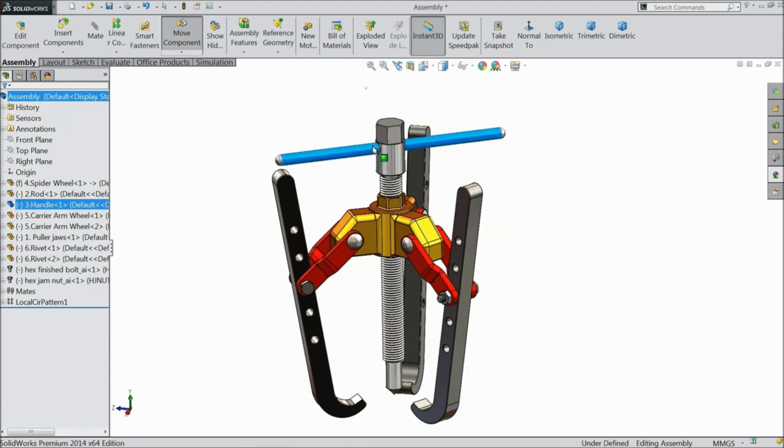We are going to design and assemble a 3-jaw puller. This is the 3-jaw puller, and this is the threaded rod. With the help of the puller we can extract any kind of bearing. This is especially a bearing puller. Let's see how to do it in SolidWorks. I hope you like it.

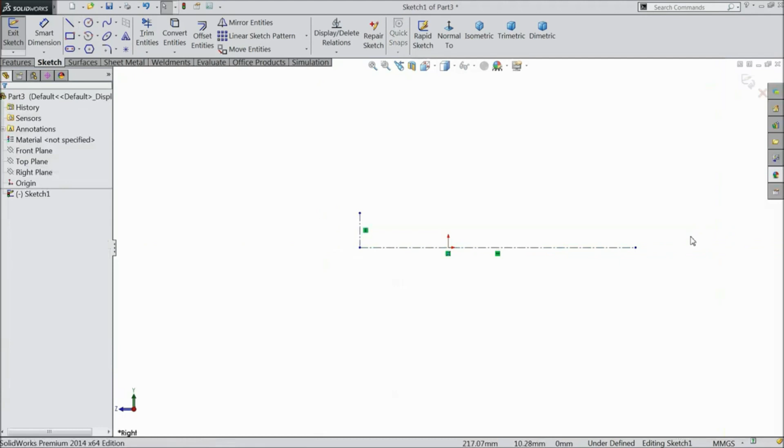Now here we will make the first part of the puller, the 3-jaw puller jaws. Let's start: choose right plane, sketch, and select center line. Start from here and pass through a line, making sure it passes through the origin. Select the line up to this line and draw a half circle.

Now select these 3 lines and make a relation symmetric. Now this geometry is symmetric. Draw a vertical line. Select circle and draw 5 circles here at equal distance and equal diameter. Now select these 5 circles and make them equal.

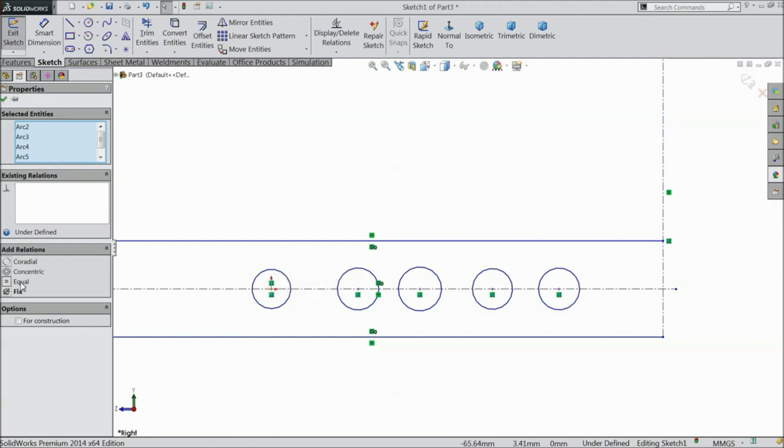Now first define the gap distance from origin point: 152.4 mm, and the distance from here to this point: 42.8625 mm. Make the radius 15.875 by 2 mm, and keep the inner circle diameter 7 mm.

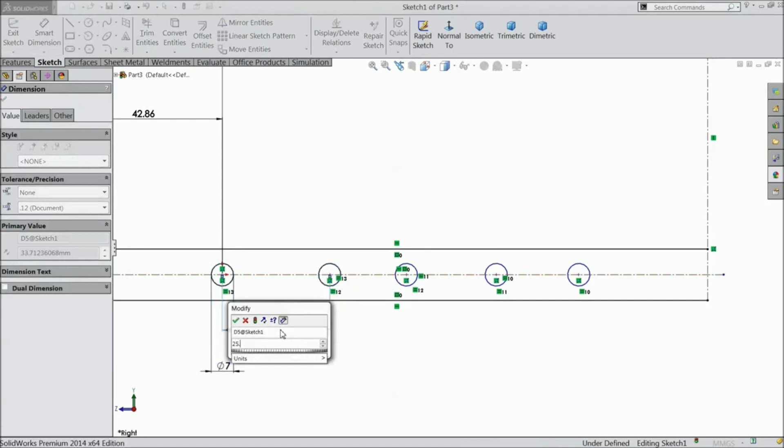Now we will define the distance between these two circles: 25.4 mm, the same 25.4 mm, .8 mm, and the last one from the third one 50.8 mm. Now this geometry is defined.

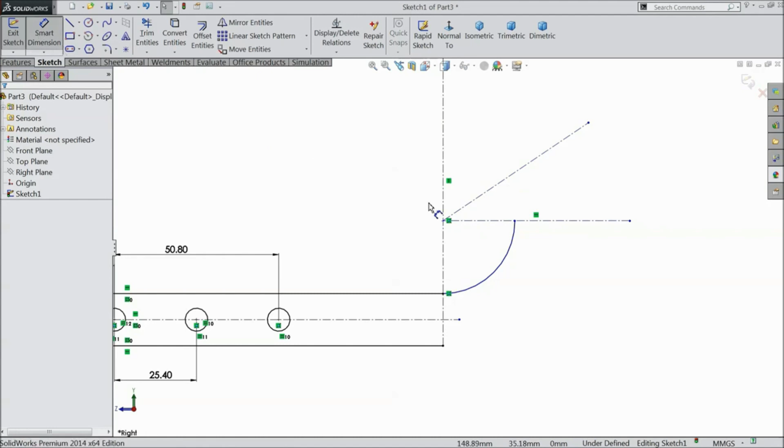Now choose center point arc here. Start to draw a circle. Just draw a center line. Make this angle 30 degrees. Select a line.

Connect with this line up to here and draw a circle. Connect here. Exit. Now make one relation: tangent.

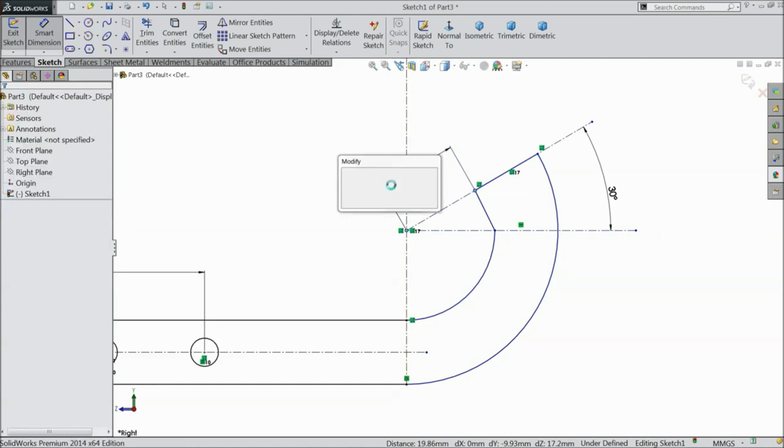Now define the gap, and define the radius: 15.875 mm.

Delete this circle because this circle's center should not be there. Select the center point, just below this, and connect with this line.

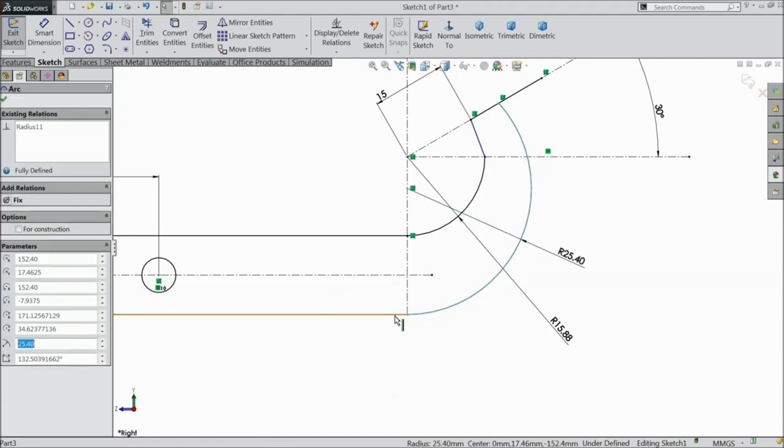Now just define the radius: 25.4 mm, 25.4 mm. Now make a relation between this line and this one: tangent.

Select trim entities. Now select these two lines. I think no need, it's already in perfect position. Select fillet and define these two lines as 3 mm. Now this is our geometry.

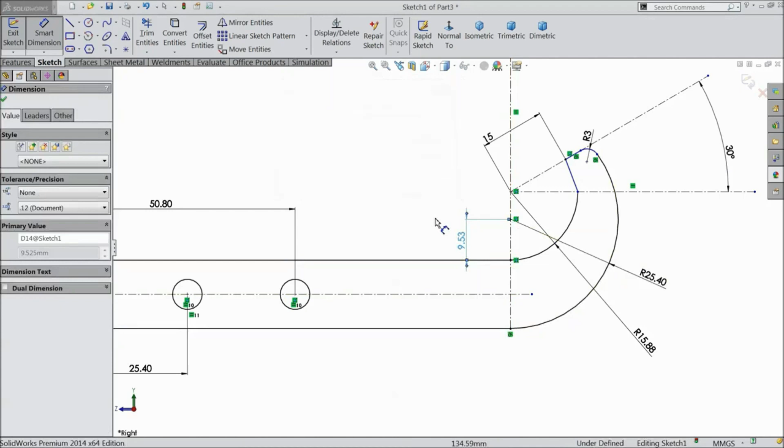Now we will extrude it. Make sure this point is 9, by default 9.525 mm. Now select extruded boss and extrude up to 15.875 mm, choosing mid plane.

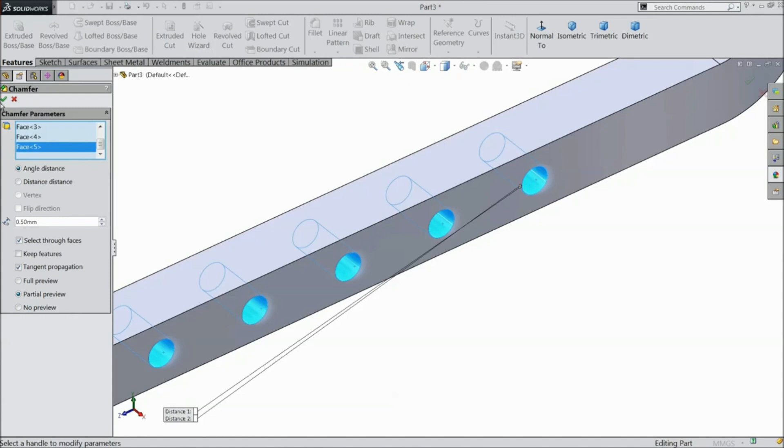Now select chamfer: 0.5 mm, and select these inside faces of the hole. See, it's become a 0.5 mm chamfer. Now select fillet, keep 0.5 mm. Select one surface and another edge, and select two edges. Now this is the jaw for the 3-jaw puller.

Let's define the material: chrome plating.

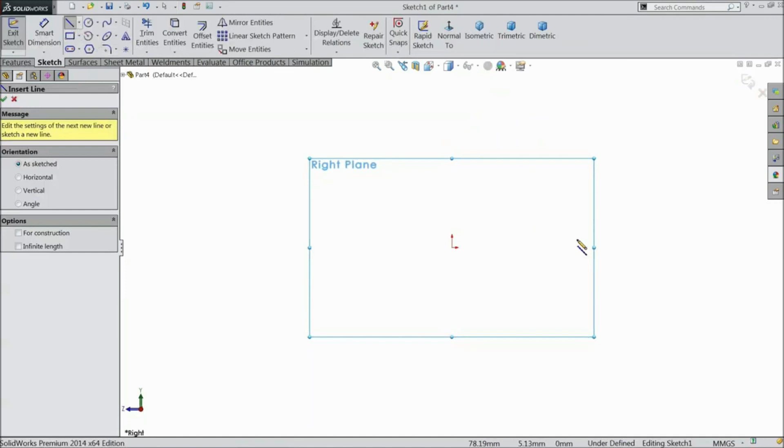Rod. Let's start: choose right plane to sketch, select a line, and start from the origin point. Draw a vertical line and connect again to the origin, exit. Now select this line and make relation vertical.

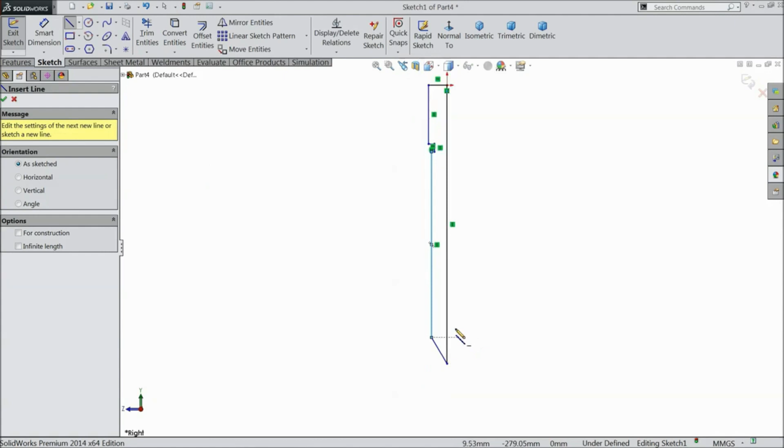Drag this inside, and drag this line also a little inside, not just inside - this is the outer line. Connect this point. Now delete this line and merge here. Now this is the exact geometry.

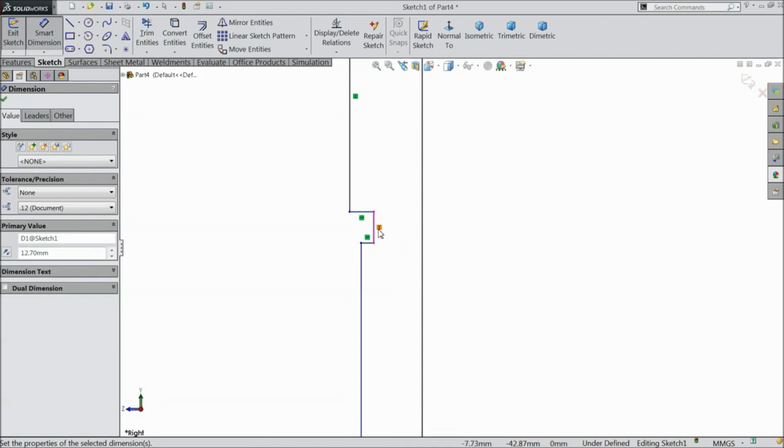Now let's define: 25 by 4, 25.4 by 2 mm, 7.5 mm, 19.05 by 2 mm. And let's define this: 14.2875 by 2 mm.

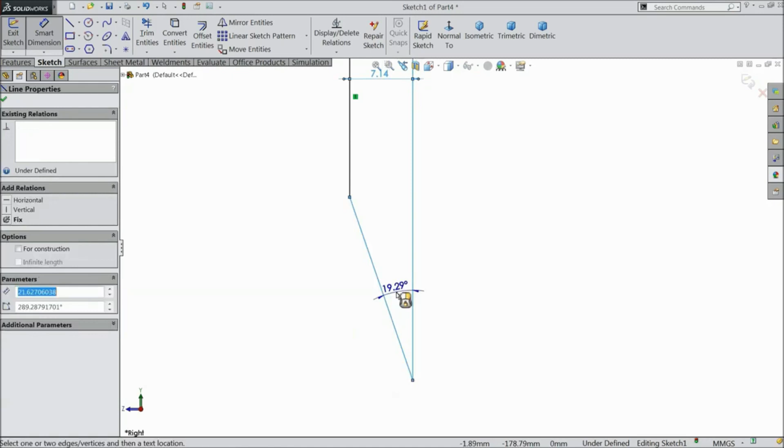Now let's define this angle: 45 degrees. Now we will define the length. First let's define the bottom length: distance from here to the bottom point, 31.75 mm.

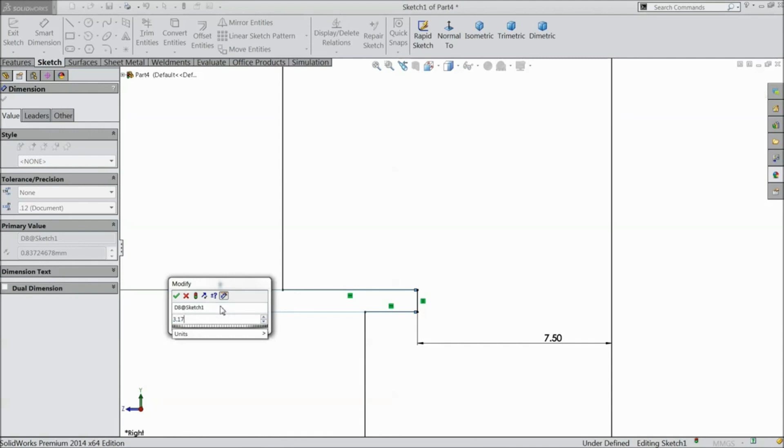44.45 mm for this length, 3.175 mm. Now let's define this length: 165.1 mm. Okay, now our geometry is fully defined.

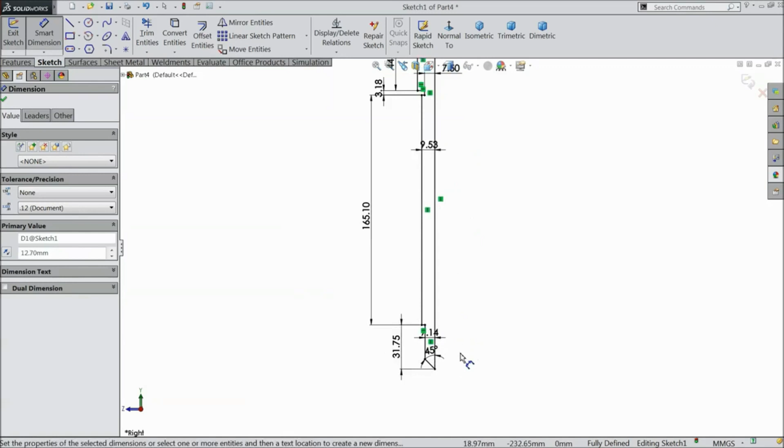Select revolve boss base and select this outer line as the axis. Now choose chamfer, first keep 1 mm, and select this face.

Now again choose chamfer, 0.5 mm, and select this bottom edge. Now here we will create some teeth.

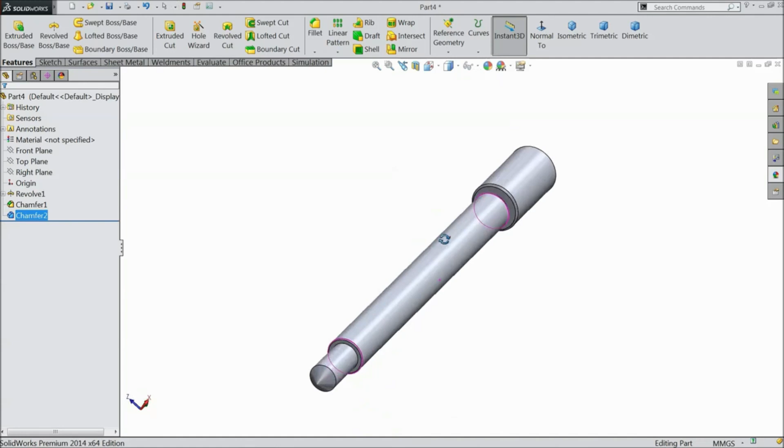So select this face, this sketch, select this outer circle and convert it - see, it is converted here. Now we will create the path for thread. Go to helix and spiral, and select pitch and revolution.

We will select the number of pitch: 2.116. Revolution: 79 mm, 0 degree, clockwise. That's it, this is our requirement.

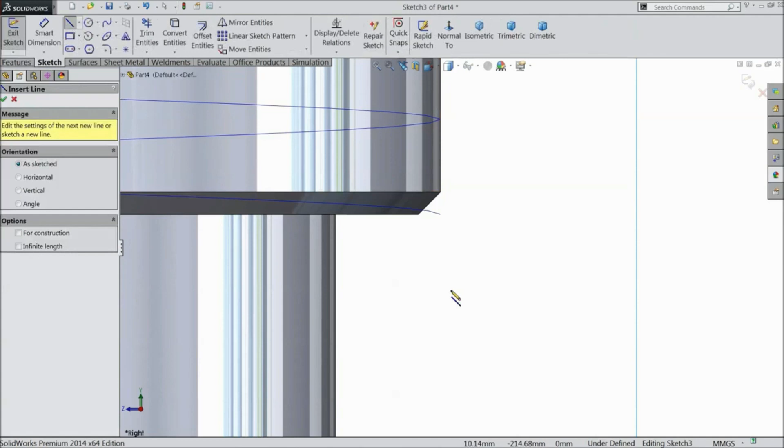Select OK. Now select right plane, sketch, normal, and here we will create the teeth path profile. Select both lines and make relation equal.

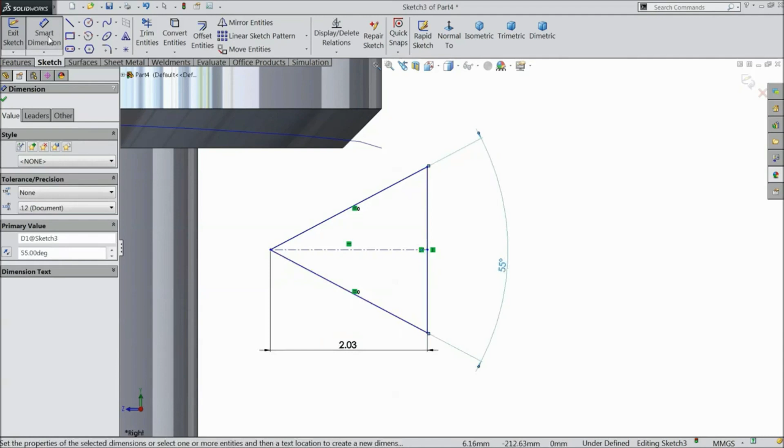Now let's define the triangle: 45 degrees, keep 55 degrees. Now the distance from here to here: 2.033. Now select arc, select 0.29, 0.29 mm.

Now select this path, meaning this helix line, and select this point, and make relation pierce - see, it is pierced here. Now just exit and go to swept cut. Here the profile is selected, just select this path. Now it's calculating; it may take time because the threads are very small and complicated, so sometimes it takes more time than actual.

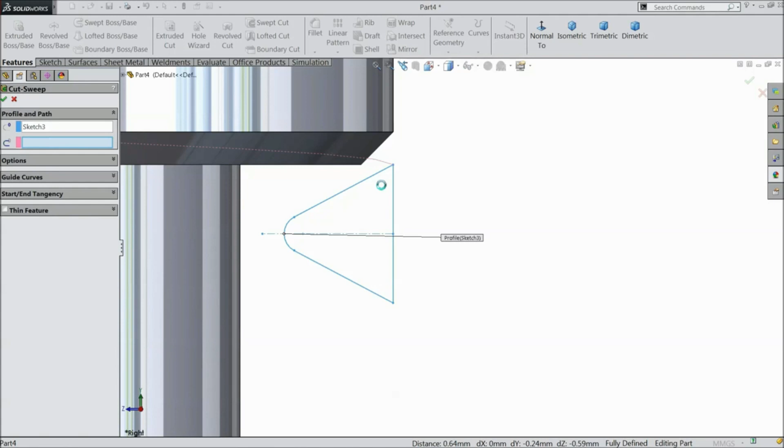Now it's finished, see - it's calculated. Select OK. Now see, the threads are created. Choose fillet, select 0.5 mm, and select this.

Taking time because maybe my computer is slow.

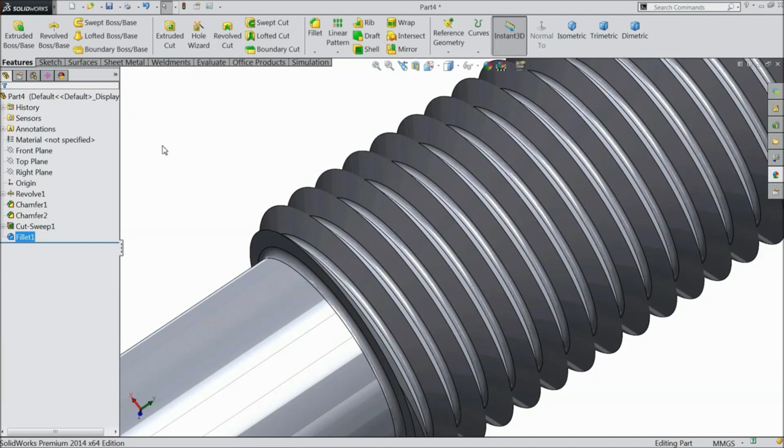Now we want to create some hole here. Select front plane, sketch, normal. First draw a center line, select line, and draw a circle in the center, keeping the diameter 10 mm. Select extruded cut and select through all both. Now the hole is going to be created.

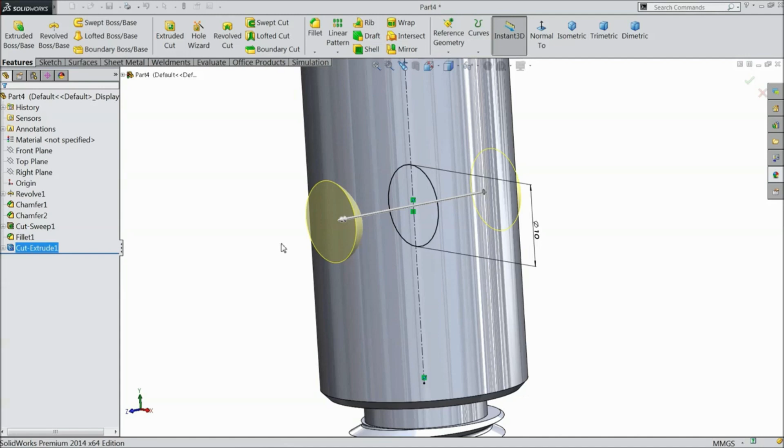Now select this top face, sketch, normal. Select polygon. Exit. Select this line: vertical. Now select this outer circle and convert it, that's it. Now select extruded cut and here choose this outer face.

Okay, that's only. Now just extrude up to 15.875 mm. See here. Okay.

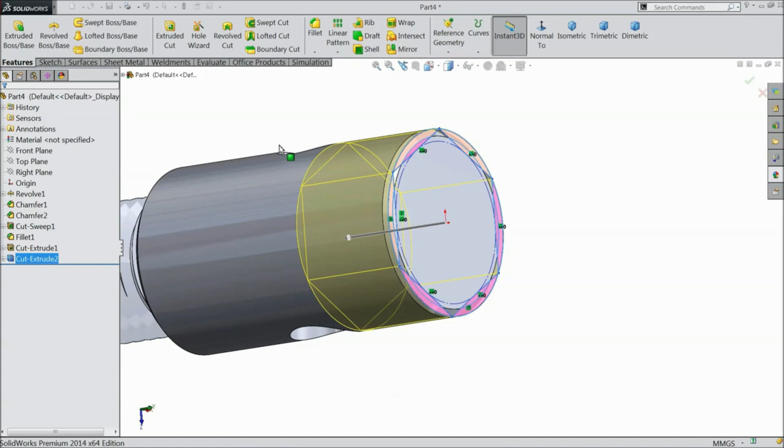Taking time because my computer is quite slow. Select 0.5, select this hole and select this edge. Close. Delete this edge. Now select this circle only.

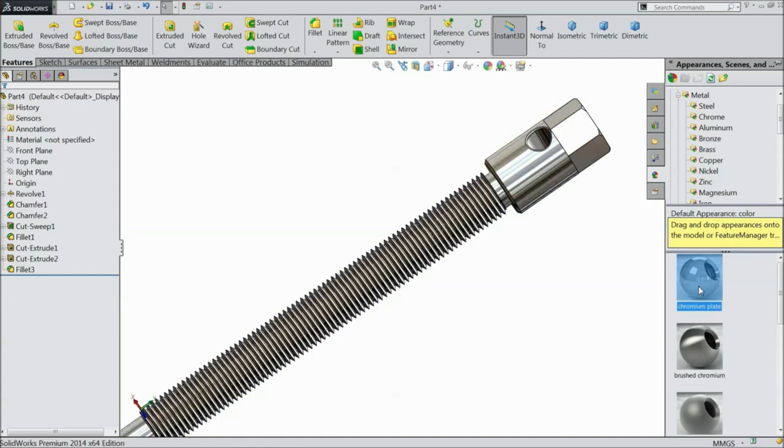Okay, now our rod is finished. Now we will assign the color or material. Just go to appearance and select chrome plating. See, this is the chrome plate.

Now save this part number 2, rod. Let's go for the next part.

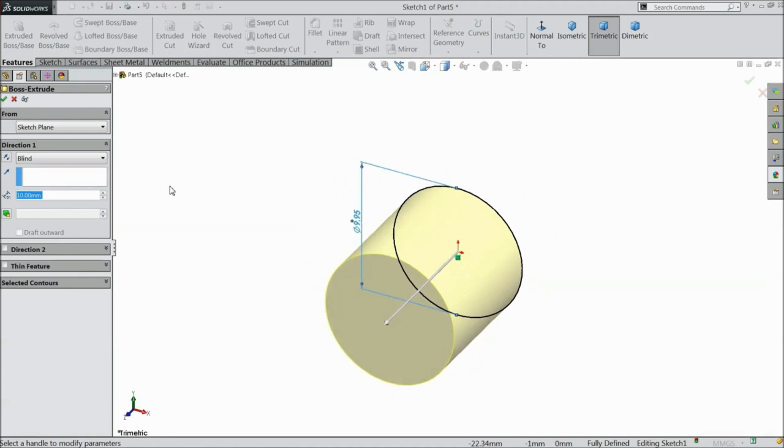Front plane, sketch and draw a circle and keep the diameter 9.95 mm. Okay, and extrude it. Keep the length 200 mm. Make sure mid plane. Okay.

Now select, go to insert feature and select dome. Select this face, 9.95 by 2 mm. Possible to select both the ends.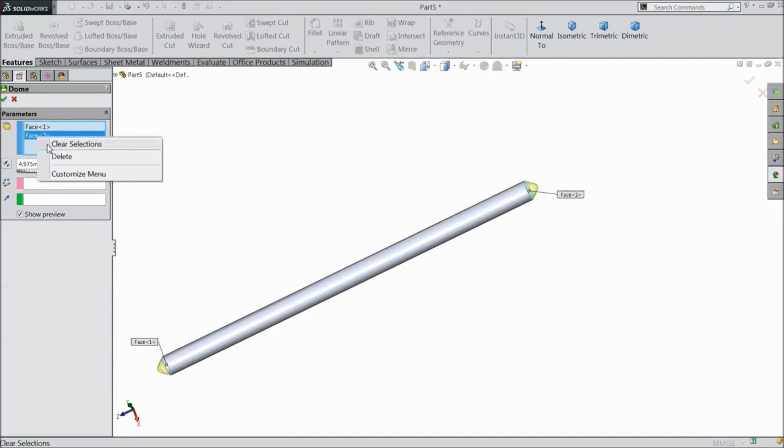I think it destroys the face. Delete. Okay. Now again go to insert feature and choose dome and select the same, 4.975 mm and select this edge. Okay.

Now we will assign the material steel satin finish stainless steel. Save. Now save the part number 3, handle.

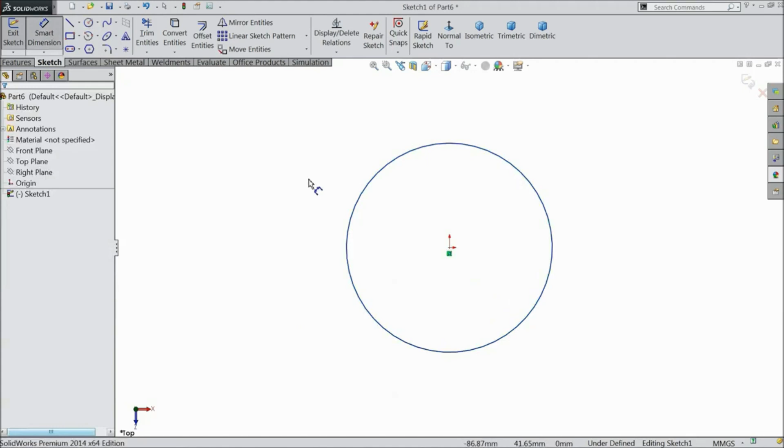Okay, so the next part is spider wheel. So choose top plane, sketch, draw a circle, keep the diameter 38.1 mm. Okay, and extrude it, keep mid plane, 50.8 mm. Okay.

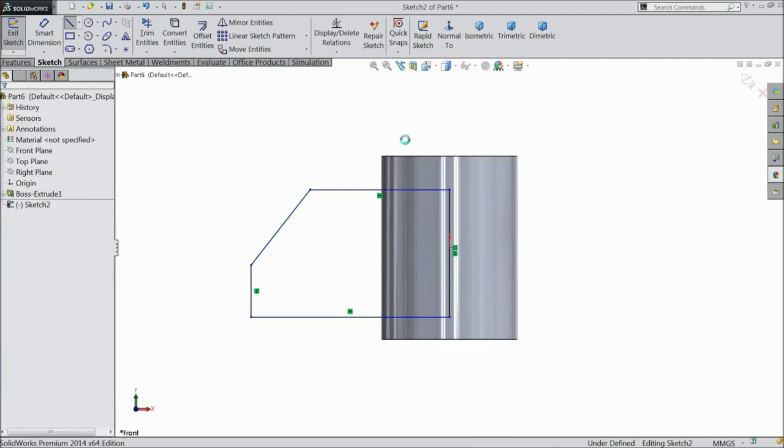Now select front plane, sketch, normal, select a line. Okay. Now let's define this geometry.

Distance from upper line 12.7 mm. And from bottom line 2.5 mm. Now define the overall length 53 mm.

This length 35 mm. Okay. Now select fillet.

First select 3 mm and select this corner. Okay. Now make 5 mm and select this corner. Okay. Now define.

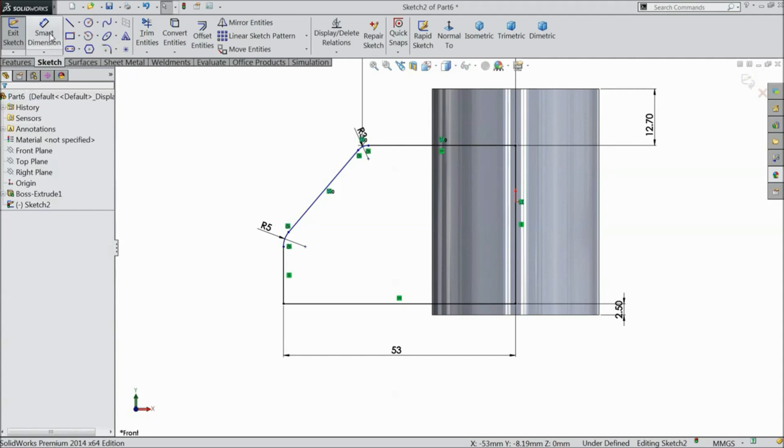Now do one thing, delete this relation. Again choose fillet. Now define distance from here to here.

Okay. Now distance from this point to this point, 13 mm. Okay.

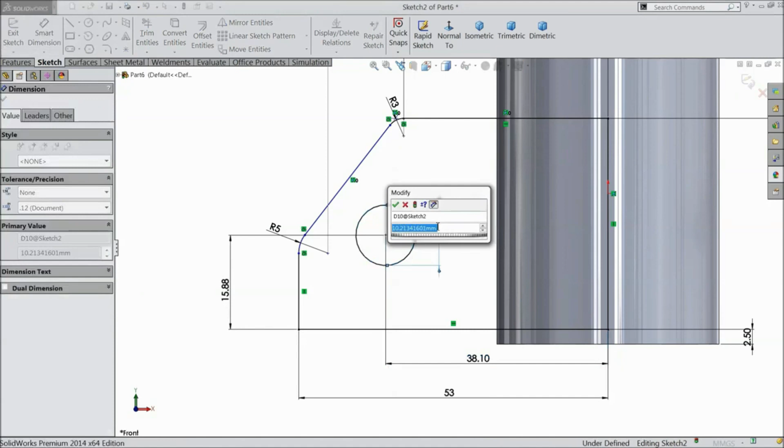Draw a circle here. 15.875 mm and the distance 38.1 mm, and the diameter 6.4 mm. Okay.

Select 15 mm. Select OK. Now let's extrude it. Keep mid plane. Select 25.4 mm.

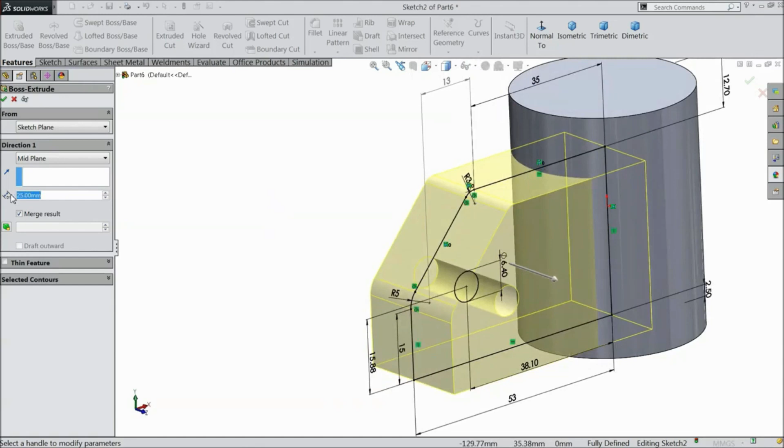Okay. Now we want to make 3 number of this body, so we want to make 3 number of patterns. Select this circle as the axis and here choose 3 number of patterns, equally spacing. OK.

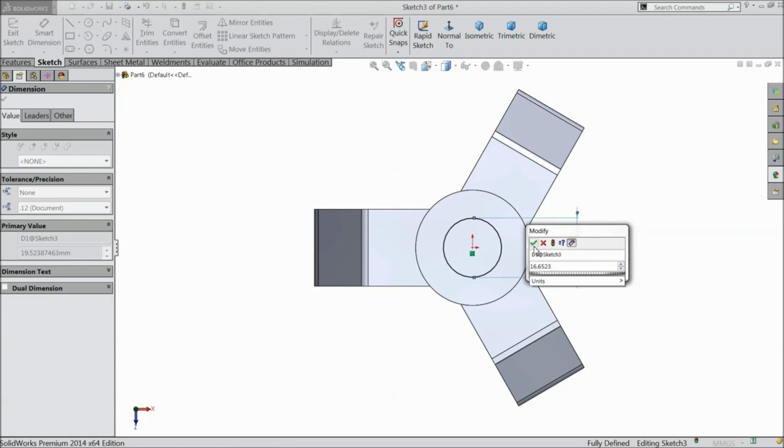Now select this top face, sketch normal, and here we want to create a hole. Keep the diameter 16.6523 mm. OK, and select extruded cut, select through all. OK.

Now we will define some fillet. .35 mm, select this edge. So now do one thing, select one by one all these 6 edges. OK.

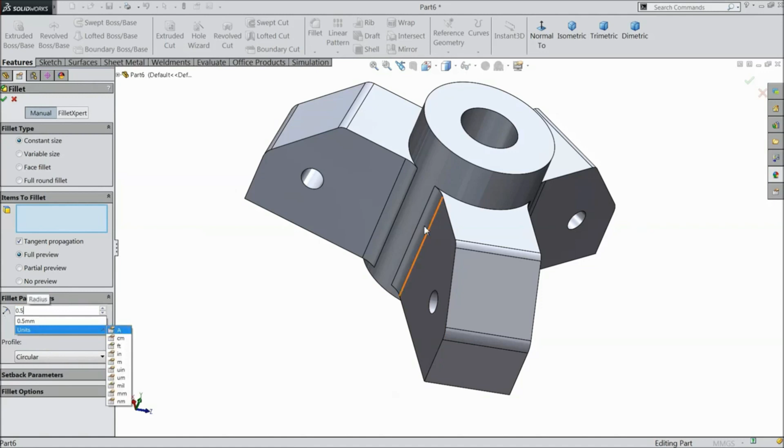Again choose fillet. .5 mm. Select this corner.

OK. Now select chamfer. Now select here 0.5 mm and select this inside face. OK.

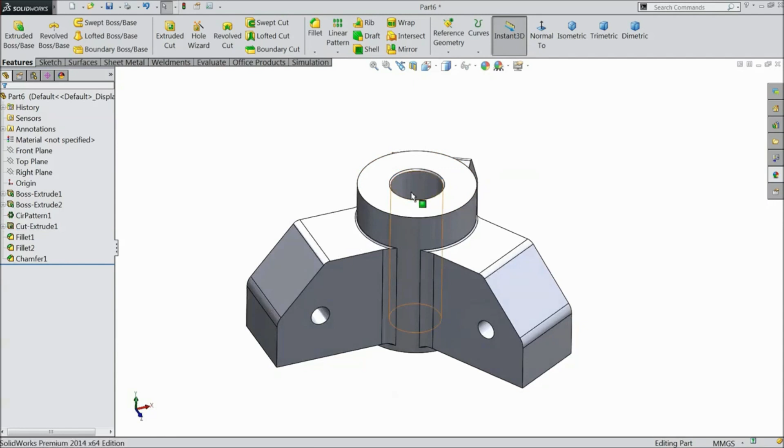Now after completing this body, we want to create some thread inside. So we will create thread with the help of our previous part. So let's browse this part.

Go to insert, select part. Select our first part, rod, which we created in our previous tutorial. Open. And here select locate part with move and copy feature. It is very important. Select OK.

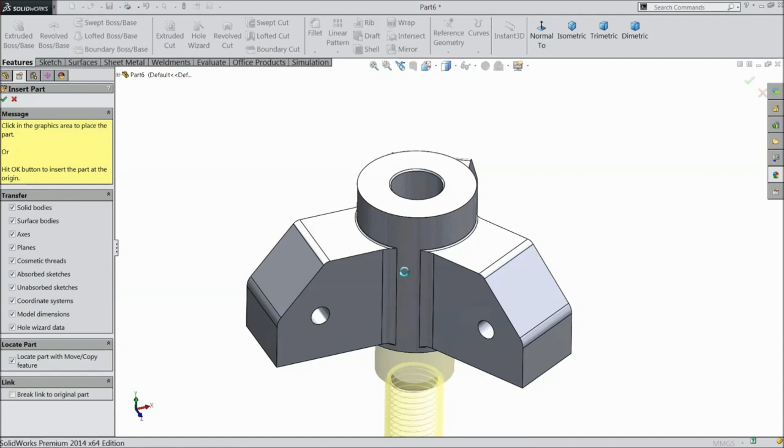Make sure it is checked here because it will ask you about the location. Now here we have to select some relation. So select this face and this face and select relation coincident.

Add. It's calculating. Now it's added. See, it's come here. OK.

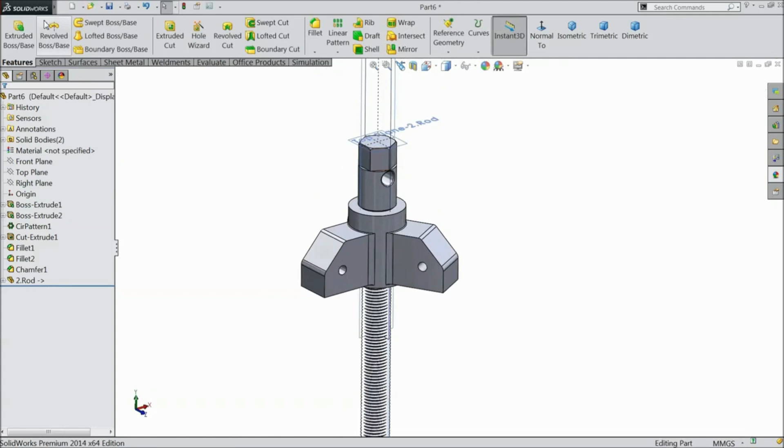Now we will do one thing. We will just minus this part, subtract this rod from this body. So do one thing. Just go to insert feature and select here one option, combine. Select subtract.

This is our main body and bodies to combine. Select this part and select here subtract. OK. Now you can see we created thread inside with the help of first part. Now hide this all planes.

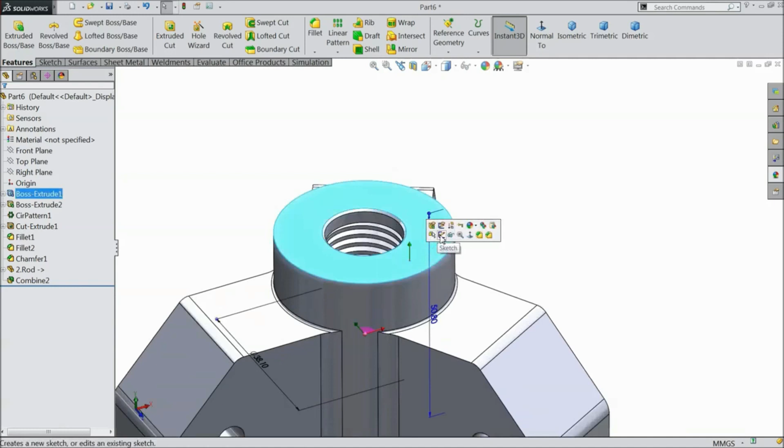Now select this face, this sketch, normal, and here we want to cut some hexagon shape. Select hexagon. Keep the length 25 by 4 mm. OK.

Now select this outer circle, convert. Select this line, horizontal. Select extruded cut and cut up to bottom 10 mm. Can see here.

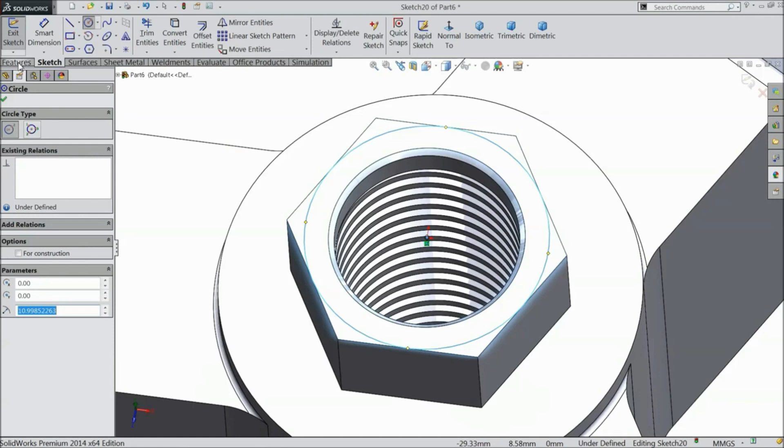That's it. Now again choose this face, sketch, and draw a circle and make sure it is touched to this point as a tangent. Select extruded cut, and this time choose flip side to cut.

And define the degree 60. See here. Okay. This fillet 2 mm.

Okay, again choose fillet 1 mm. Select this edge. Okay.

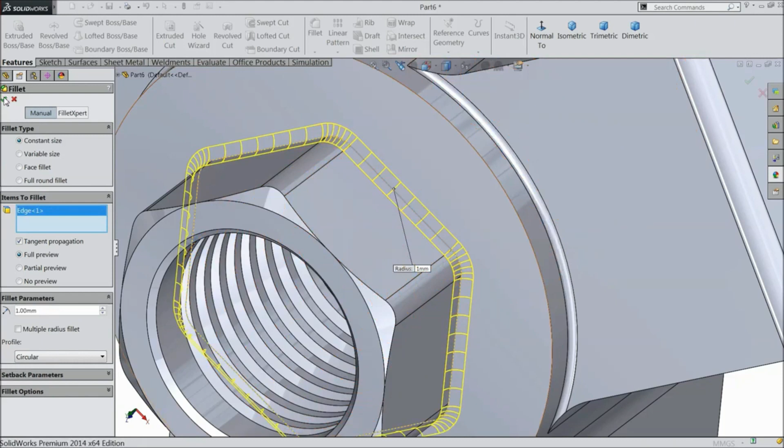Choose fillet, keep 5 mm and select 1, 2, 3, 6 edges. Okay.

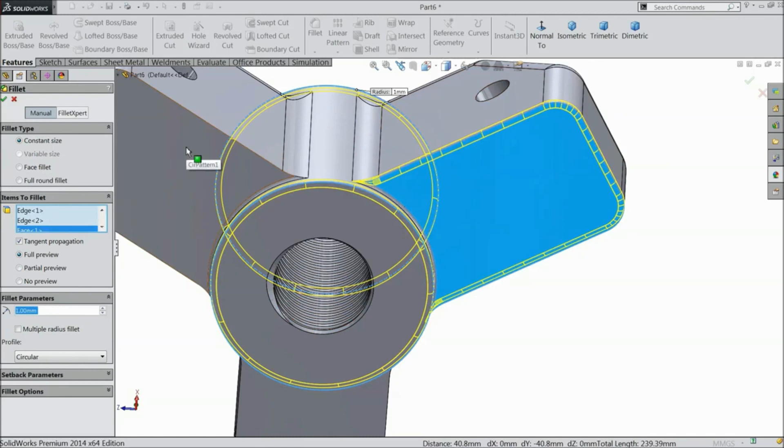Again choose fillet and this time select 1 mm. Now select this face, and select this bottom faces. Okay.

Now we will define some metallic body. Go to painted car. Select metallic gold. And go to appearance and change it. Make yellow. Okay.

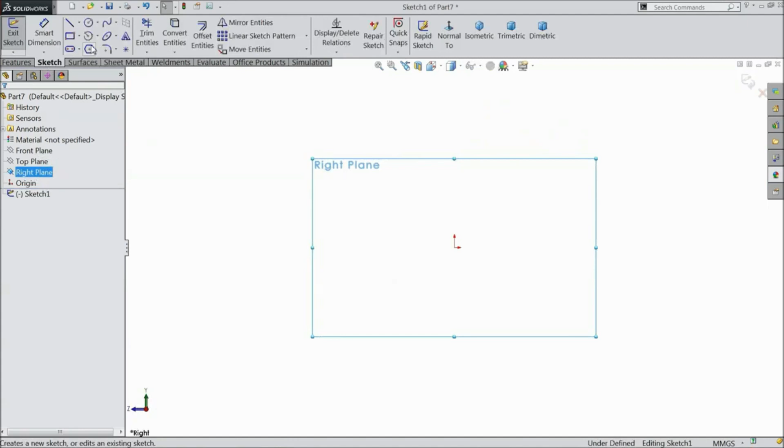See, this is the spider wheel. Choose right plane, sketch, and select here center point, straight slot. Make sure it is horizontal. Now define the length. 57.15 mm.

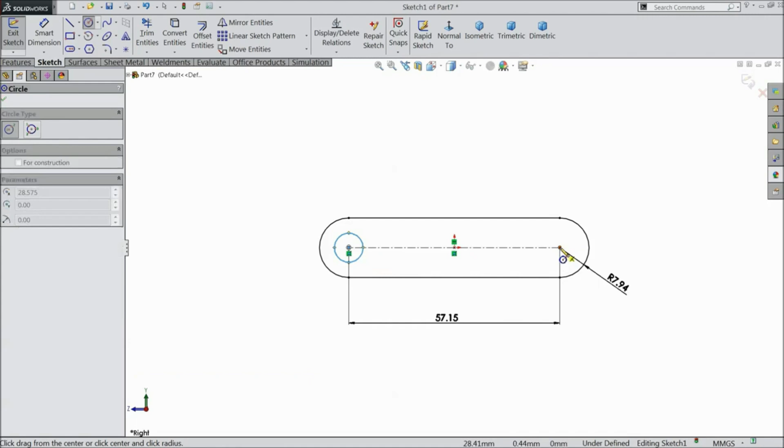15.875 by 2 mm radius. Select circle and define 2 more circles. Now select this diameter, 6.35 mm. Okay. Now select both the circle and make relation equal.

Okay. And go to sheet metal and select base. And make the thickness 6.35 mm. K factor 0.5. Okay.

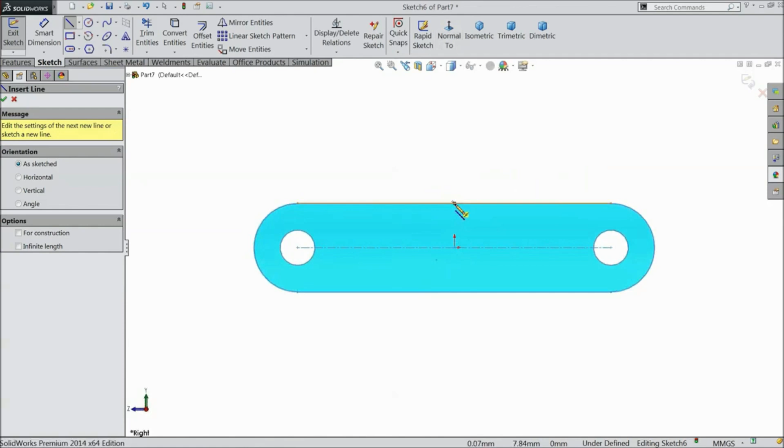Now select this face, sketch, and draw a center line which pass through origin. Go to sheet metal and select jog.

Now here we want to create bend. Select this face. See, it already took this face. Degree make 30. And this gap we will make 4.7 mm. See.

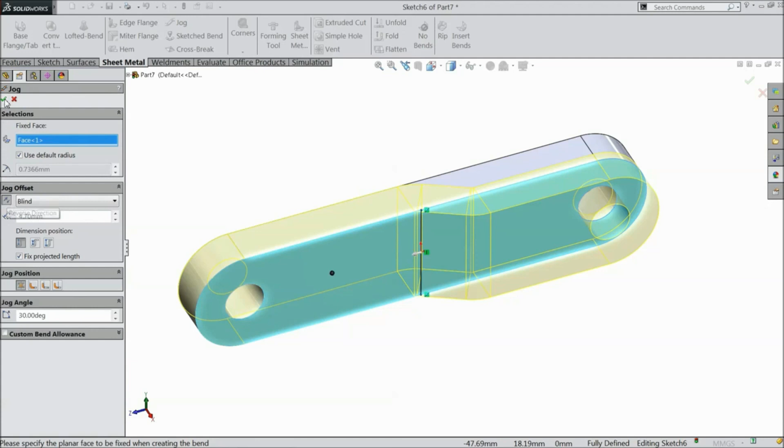Select outside offset and reverse direction. Select OK. Now this is our carrier arm wheel is ready. If you select flatten, it becomes flat, and here you will take the dimension.

Okay, now we will assign the material. Go to paint car and select candy apple. Now save this. Part number 5, carrier arm wheel. Save.

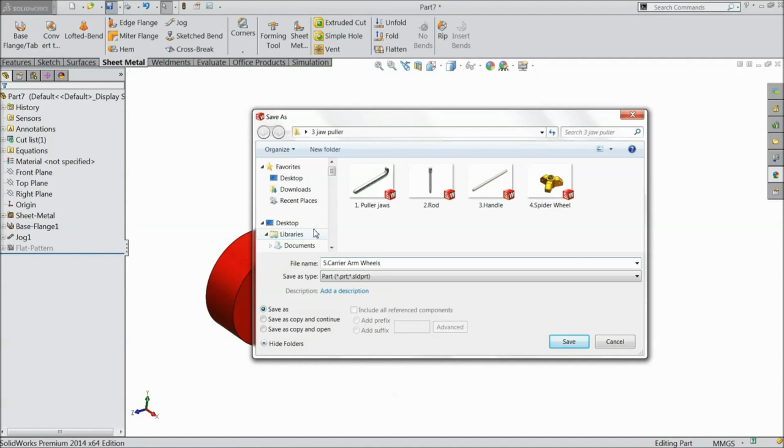Now let's do the rivet. So let's see. Better choose top plane sketch. Select a line and draw a curve. Draw a horizontal line and connect like this. Now let's define the distance from here to here.

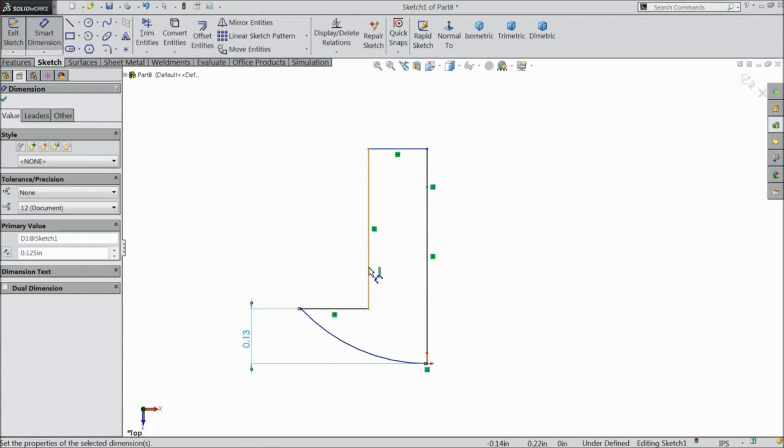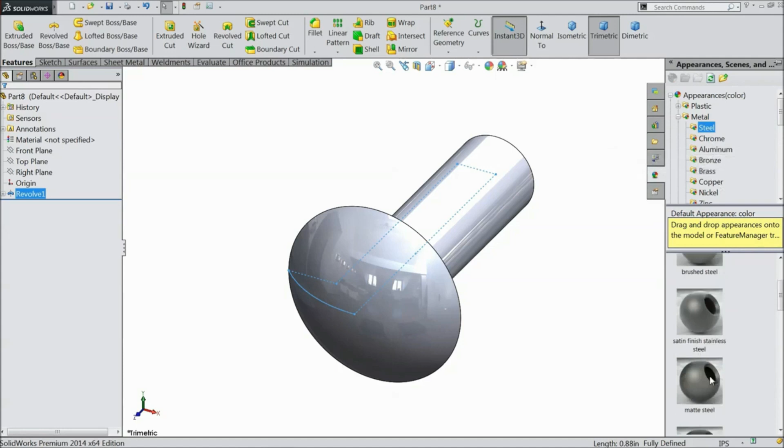Okay, now select revolve boss base and select this line as the axis. Okay. Now define the material. Stainless steel.

Browse our first part. First part we will keep spider wheel. First part always fixed by default. Right click and you will see here it is asking to float, that means it is fixed.

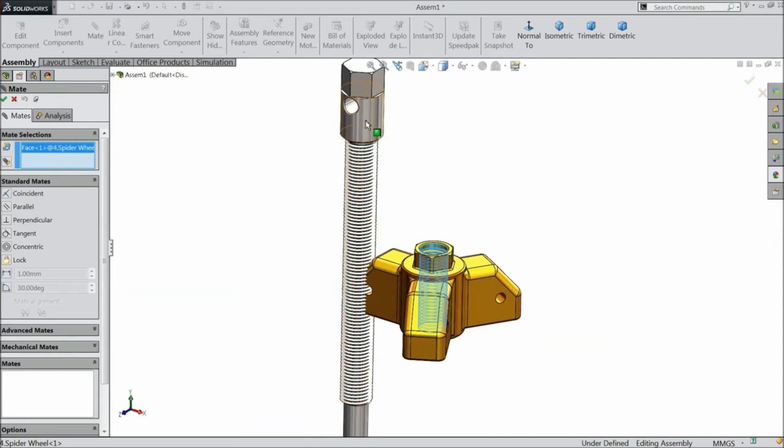Now insert our next part, rod. Okay. Use mate. Select this face, circular face, and select this face, and select concentric. Okay.

Now just go to mechanical mate and we want to create screw ratio. Select distance 2.1166. Select first this face and hide the component and select this face. Now again choose 2.1166, reverse.

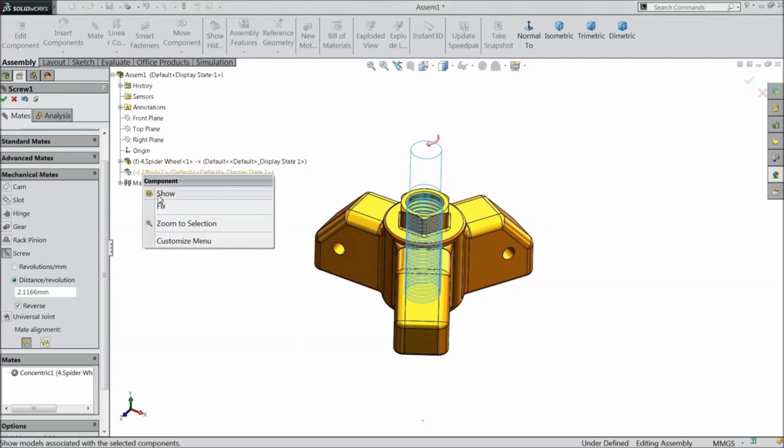Now right click and show. Okay. Now this is 2.1166, this relation created. Select OK. Okay. Now we will see it is okay.

Now it is rotating. So we will do one thing first to bring the rod or handle. Just bring handle, open.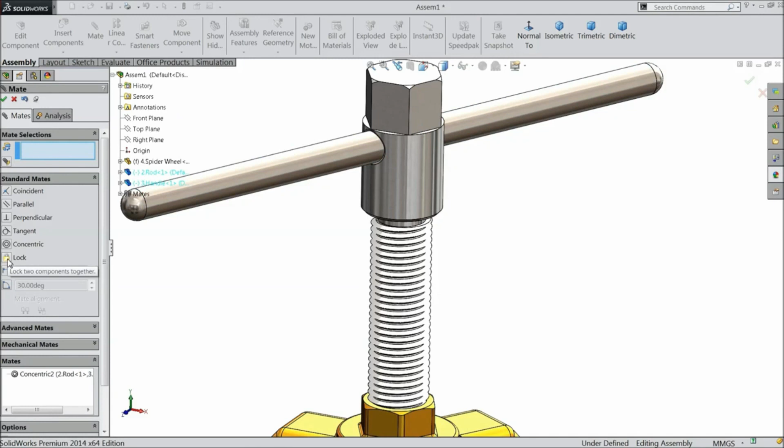Now select mate. Select this hole and this rod and make relation concentric. Okay. Now select top plane of rod or front plane of rod and of the handle.

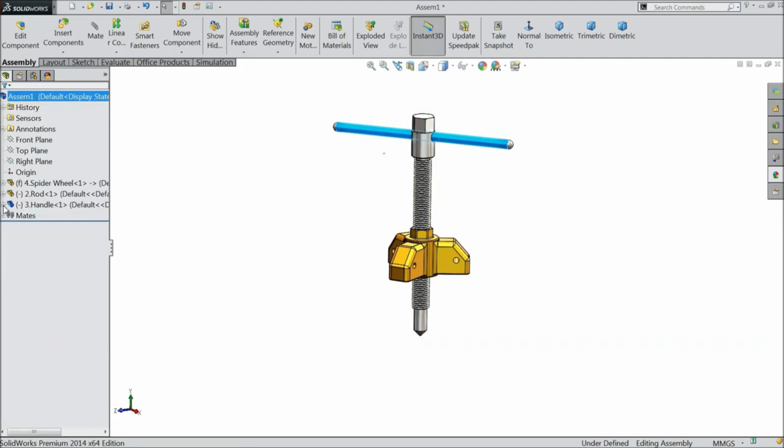Now see, this is fixed. Okay. Now let's bring the next part.

Carrier arm. Now rotate the component.

Now select this hole, mate, and this hole, concentric relation. Okay. Back surface and this surface. Okay.

Now press Ctrl key and just copy this one part. Now rotate this part.

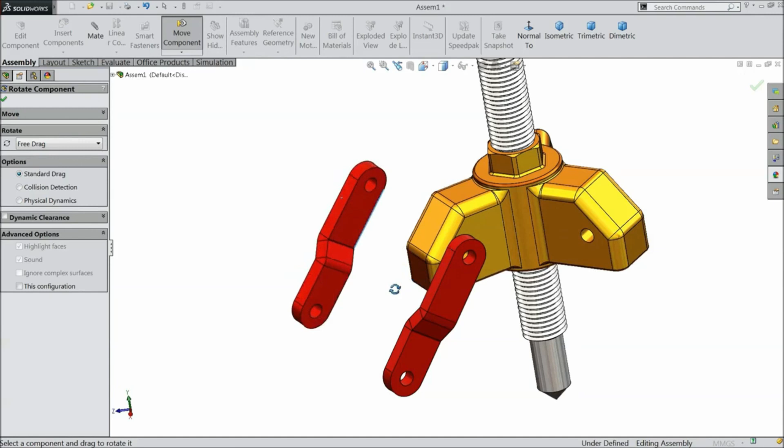Select mate. Select this hole and this hole. Concentric relation. Okay. Select this face and this face. Okay.

Now browse the next component, puller jaw. First rotate this puller jaw. Oh, this is the perfect position.

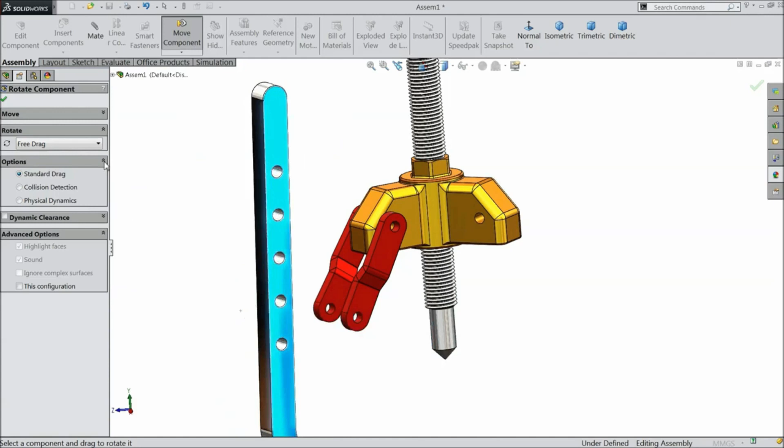Okay, now select mate. Select this mid hole and this hole. Concentric relation. Select this back surface and this surface. Okay.

Now select this hole and this hole. Concentric relation. Okay. Now the first puller is fixed. Jaw is fixed. Just bring the rivet.

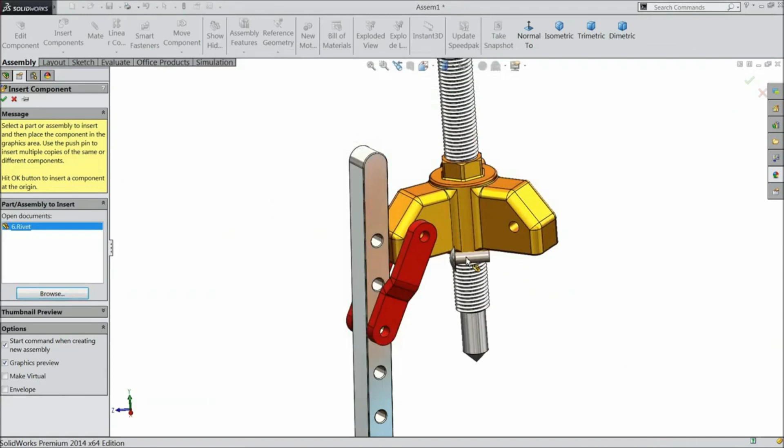Select this hole, mate. This reverse direction. Okay. The body, surface, and the back side of rivet. Okay. Now press Ctrl key and copy one rivet.

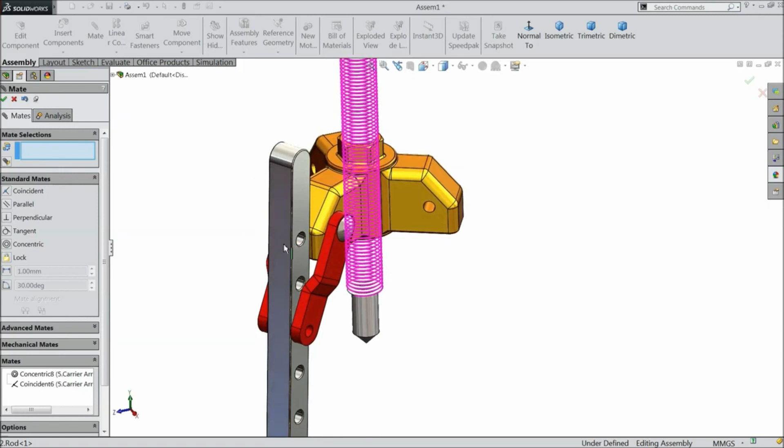Now rotate this rivet. Select mate. Select this hole. Now concentric relation. The surface of rivet and surface of carrier arm. Coincident. Now see.

Now we want to mirror all these parts. So do one thing. Select circular pattern.

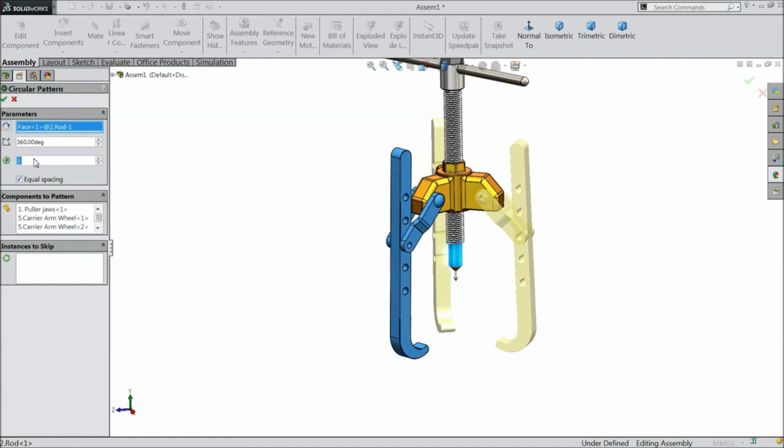Here select the component 1, 2, 3, 4 and this rivet. And for circular path, select the circle. And here select 3 number of equal spacing, 360 degree. Okay.

Now you can see. This is the puller jaw. Now here we will add some nut and bolt.

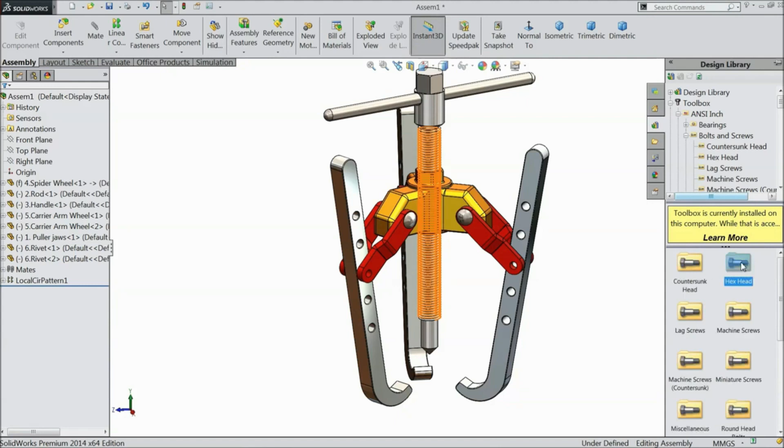So just go to your library. Select toolbox. Select ANSI inch. And first go to bolt. Select hexagon head. And select here hex finished bolt.

Just drag, and a window will come here. Here choose 1/4 into 20, and length we will prefer 1.5 mm, and thread length 0.5. Okay, and select here schematic.

Select OK, and it is asking you need more number of bolts. Select cancel. Now select nut. Select this hole and this bolt.

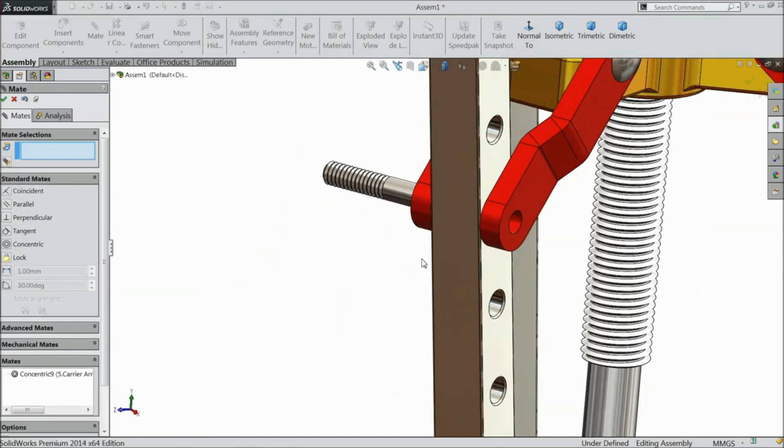OK. Select this face and select this face. OK.

Now we want to bring nut. So go to same, and ANSI inch nut and select here hexagon nut and choose here hexagon jam nut. Just drag here and it will come here. Choose 1/4 20 double chamfer schematic.

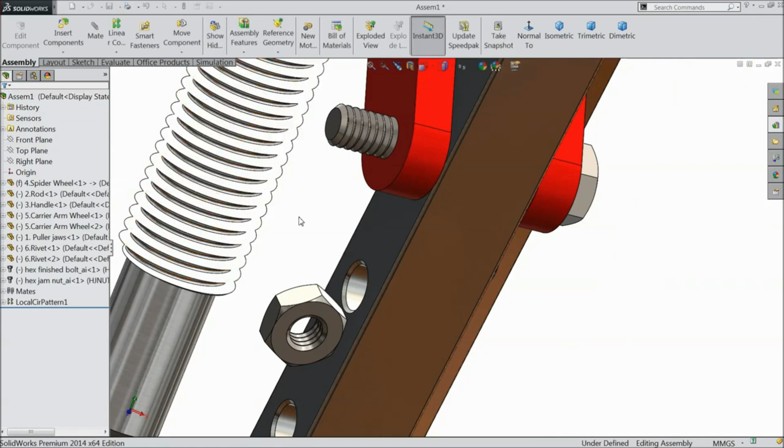Okay. Select no, we want only one. Select this circle, mate, and select concentric. Okay. Okay. Now here the nut bolt is fixed.

We want to add something here. Just edit, and in component add, select this two component also, nut bolt. Select OK. Now see the nut bolt also added.

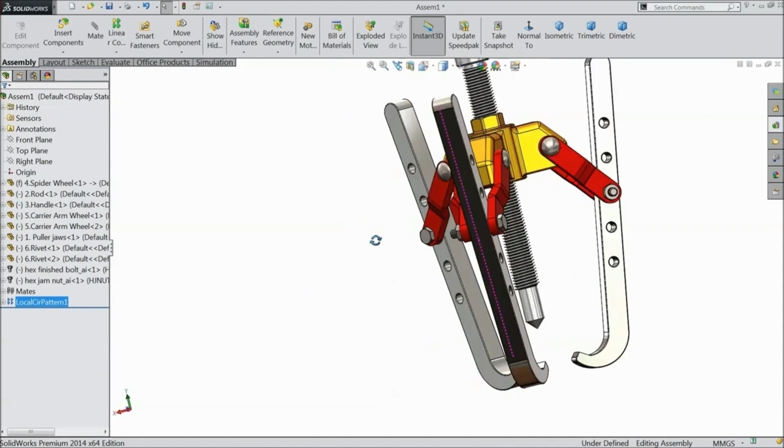Now this is our 3-jaw puller. I hope you like it.